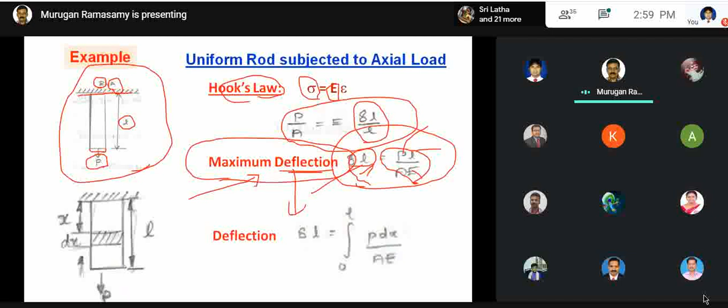If I want to get a mathematical form of this one, that means if I want to evaluate the elongation of this bar at any particular point, if I want to measure the elongation of the bar at a distance x meter from the fixed end, what is the elongation? This equation will give you only maximum elongation. So I want to measure the elongation at any particular point in this. For that I am using the concept of integration. So here we are dividing the total length of the bar into elemental length dx, like that. So this dx is placed at the x meter from the fixed end.

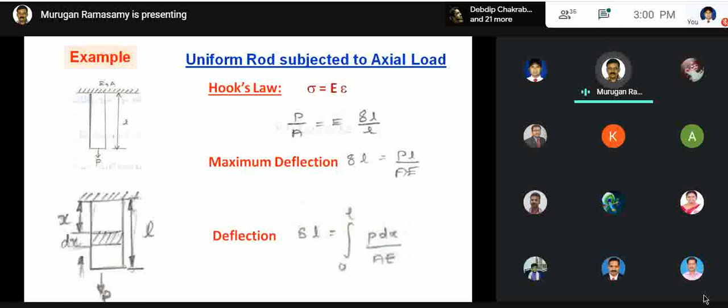So now, without going much into integration, we can directly write this equation for del L. Just compare this and this, that is why I am telling this one. So del L is the deflection. Now if you want to find the maximum deflection using the mathematical form, we are using integration from 0 to L, where lower limit is the fixed end, upper limit is the free end, because x is varying from 0 to L. X equals 0 means here, x equals L means free end.

Now PL by AE, same equation only, we are slightly modifying. Instead of L, we are using dx, that elemental length. So when you do integration of this one, P, A, E are constant, we can take it outside of the integration. Integral dx will give you x. When you substitute the limits for x, you will get L. So finally you will get this equation. So now this is a very simple problem, so we can get the solution easily.

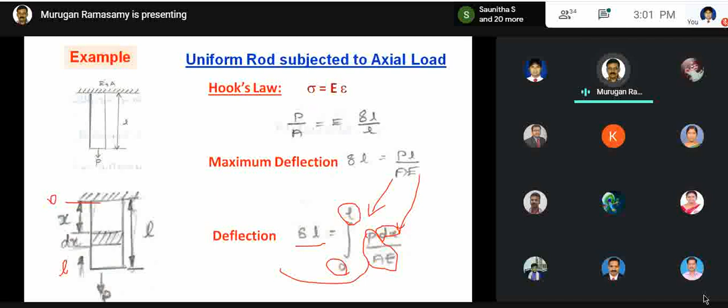Now just I will increase the complexity of this problem. Instead of considering a uniform rod, just let us consider a taper rod.

One minute. Sorry for the disturbance.

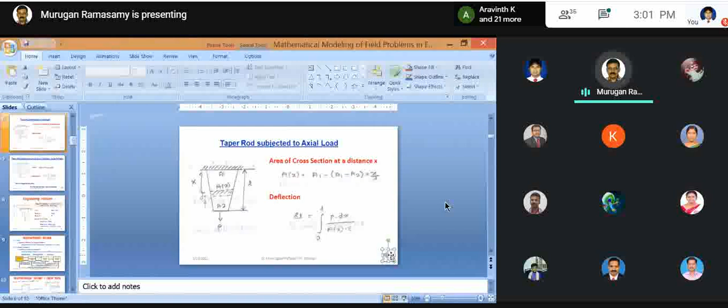Yes, so now I'm just increasing the complexity level of this problem. So am I audible? Yes, sir.

Yes sir, so instead of considering the uniform rod, I am considering a taper rod here. So with taper rod, the area of cross section is variable now. Previously we considered A as constant, but now A is a variable, which is a function of x, depending upon the distance from the fixed end, the area of cross section of this taper rod is going to vary.

So for this equation we can easily derive by using the similar triangle rule. So A of x at any point, the area of cross section will be like that: A1 minus A1 minus A2 into x by L.

Now, if you substitute this variable cross section in the equation we derived earlier, A of x becomes a function, that means a variable of x. So when you do integration, p and e alone are constant now, so we can take p and e outside the integration. What remains is the integral of 1 by Ax dx. We know that 1 by x is nothing but log x, so we get a logarithmic solution.

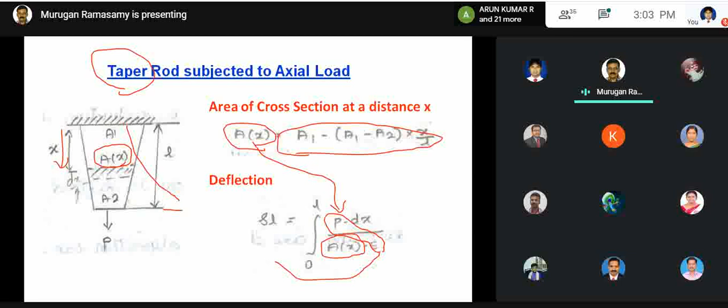Now I'm just increasing the complexity level further. Now consider a taper rod subjected to axial load. The area of cross section is varying and axial load is also acting. In addition to that, we are considering the self weight of the member.

When you consider the self weight, for any engineering problem, the problem will become a non-linear problem instead of linear. So this is the self weight of the member. When you consider it, the self weight will vary from fixed end to free end. At the free end, it will be zero; at the fixed end, it will be the maximum value.

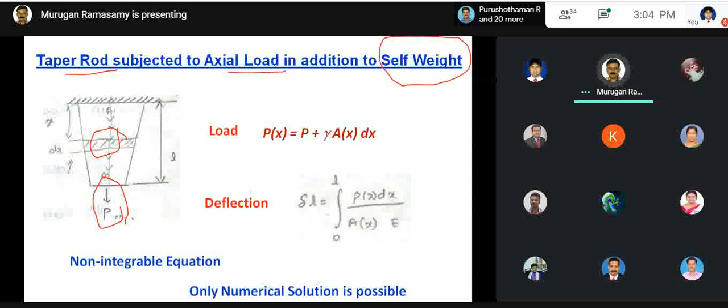How to evaluate this self weight? That is by using density multiplied by the volume. Here I am using the symbol gamma, which is the weight density. There are two types of density: one is weight density, another is mass density. Here I am using weight density, with unit Newton per meter cube.

Now multiply by elemental volume A of x dx, which is a variable. P is constant load, so when you add this, the load becomes a variable now. We have changed the area as a variable, and P of x, the load, is also a variable.

When you come to that integration, P of x as well as A of x, both in the numerator and the denominator, are functions of x. There is no standard formula available in the integration for this. So this kind of problem becomes non-integrable, and we have to depend only on the numerical solution.

So you have to understand, when you take a simple problem like the uniform rod, a standard solution is available. Taper rod with axial load, a standard solution is available. But taper rod with axial load considering self weight ends up with a non-integrable solution, no classical solution available. So we are going to apply a numerical method; FEM is the best way to solve this problem.

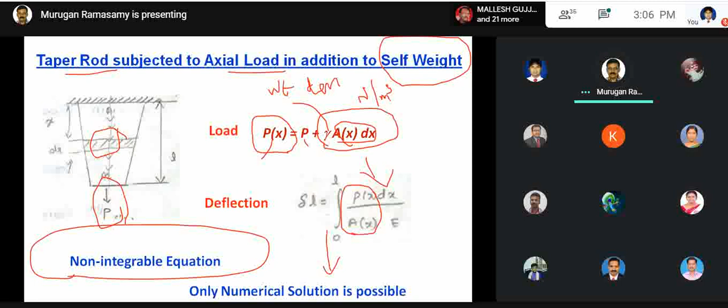Now this is what we discussed for an engineering problem: the complexity may increase in all four parameters. Load may be non-linear, geometry may be non-linear, material behavior may be non-linear, and boundary conditions become more complex. If the complexity level is increased, then we have to depend on the numerical method, that is the finite element method.

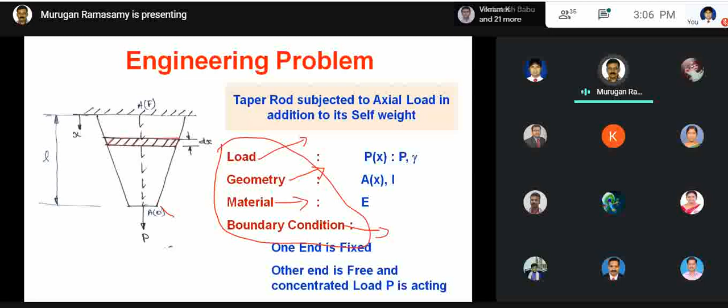Now I will go to what is the mathematical model. We have just finished discussing what is an engineering problem, defined by using 4 parameters. If any complexity is involved in these 4 parameters, we apply the finite element method to solve the problem. To solve a problem using finite element method, first we have to convert the physical problem into a mathematical model.

So what is a mathematical model? It is a set of equations which governs the physical phenomenon. That equation may be either algebraic, differential, integral, or a combination of these. We are trying to define the physical phenomenon in terms of mathematical equations. Once you get that mathematical equation, then only we can do further analysis. That is the important point: as an engineer, we should know how to convert a physical engineering problem into a mathematical model.

So for that, I'll give again one simple example.

Then we will go to the finite element formulation. Before that, remember this point: whenever we convert a physical problem into a mathematical model, we use some assumptions. These assumptions are called idealization. Because of idealization, we are able to model the problem by simplifying it to our knowledge. That means the mathematical model itself contains some error, because of the assumptions. That is called a modeling error.

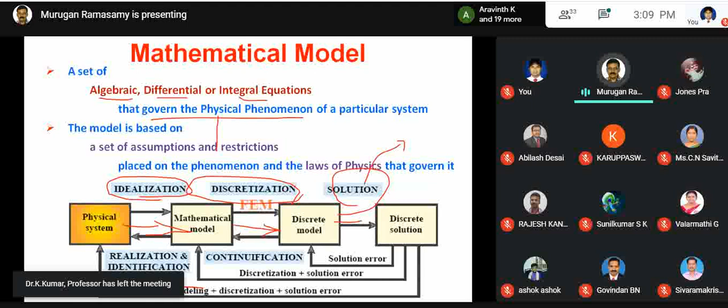This mathematical model is then converted into a finite element model, which is nothing but a discrete model. When you convert the mathematical model to the discrete one, there will be some error called discretization error. When you solve the discrete model using various solvers, we give some compromise to the accuracy of the solution, so we can stop the iteration process. Sometimes we say third or fourth level decimal accuracy is enough.

So like that we can stop the iteration process. That is called rounding off error. We cannot run the program endlessly, so we terminate at a certain level of accuracy. That is called rounding off error. So any numerical method will have all these errors. That is why we say it gives only an approximate solution, but that approximate solution is acceptable.

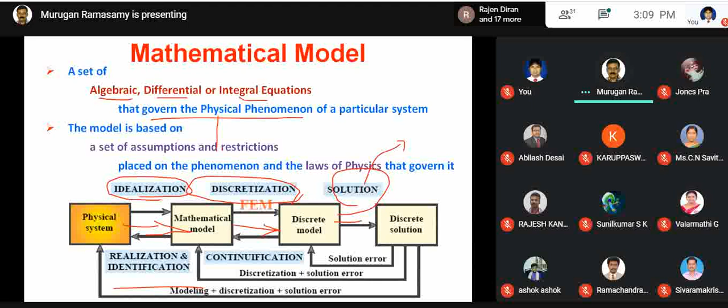Now for a mathematical model, I'll take the taper rod problem, to show how to convert a physical problem into a mathematical model. I consider the same example for continuity. We consider a taper rod subjected to an axial load at the free end, then we include the self weight.

Remember, if you want to convert a structural problem into a mathematical model, we have to do three steps. First, draw a free body diagram. Second, apply equilibrium equations, which mostly will be a force equilibrium equation, or an energy equilibrium equation in case of a thermal problem. We consider an elemental volume, draw the free body diagram, apply the equilibrium equation, then use the constitutive or elasticity equation. Then only we get the governing equation for the particular problem.

I will explain these steps through this simple example. Consider this elemental length dx, which is x meters away from the fixed end. I am showing this dx length as a free body diagram, in the horizontal way.

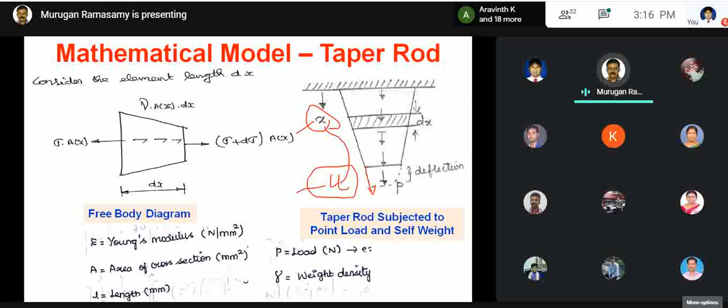So in that case we are trying to define the sigma term in terms of that dependent variable u. Then only you will get the governing equation correctly. So for replacing sigma in terms of the dependent variable, we use the equation called the constitutive equation, or in some textbooks they call it the elasticity equation. We know this is an elasticity equation.

This constitutive equation gives the relation between that parameter sigma and the field variable. So now we can easily replace this. Strain is nothing but du by dx, where du is the change in length and dx is the original length. So by definition we can write du by dx.

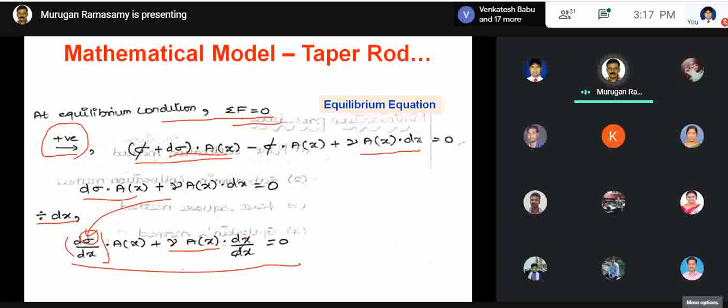So now for sigma we are replacing this term. Sigma multiplied by a will give you the force, right? So e du by dx, and a of x is also there, so we are taking it inside the bracket. So d by dx...

EA du by dx plus gamma a equal to 0. Now, A means A of x, but for understanding purposes I am writing EA.

Now, what is the nature of this equation? It is a second order differential equation with the right hand side equal to 0. That means it is a homogeneous second order differential equation. This equation defines the taper rod problem.

So actually, the original engineering problem is a taper rod subjected to axial load in addition to the self weight. That problem is converted into a governing differential equation. So this thing we have to understand.

So if you want to convert an engineering problem into a mathematical model, it should consist of three things. To convert it into a mathematical model, remember three steps: first, draw a free body diagram considering an elemental volume; then apply the equilibrium equation for that free body diagram; then use the constitutive equation. Depending on the nature of the problem, the equation may differ, so I'll quickly go through different field problems as well.

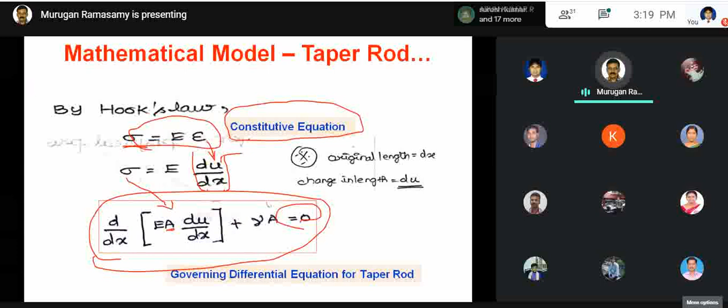Okay, so now for any mathematical model, these 3 things should be defined properly. Then only we can proceed to the further analysis, right?

So mathematical model, just now we derived this one, subjected to axial load and self weight. The governing differential equation will be this one, d by dx, EA du by dx. So it's a second order differential equation. Gamma A, here gamma is weight density, equal to 0.

Then domain, we have to define the domain. What is the limit or bound? So lower limit and the upper limit of this particular variable x, right? That is the domain. And then boundary condition we have to define.

So when you define the boundary condition, either we use the field variable itself or otherwise the derivative of the field variable. Based on that, we have 2 types of boundary conditions. If the boundary of the problem is defined only by using the field variable alone, then it is called the essential boundary condition or primary boundary condition. If you want to define the boundary by using the derivative of the field variable, then it is called the secondary boundary condition or natural boundary condition.

So here I am giving that example also. What is the essential boundary condition? At x equal to 0, what is meant by x equal to 0? Fixed end, right? X equal to 0 means fixed end. U of x equal to 0, that is displacement or deflection, is 0. Fixed end, no deflection, so 0. So this is one boundary condition. So most of the structural problems will have this boundary condition. So for solving the problem, this essential boundary condition is important. The problem may not have a natural boundary condition, but without essential boundary condition, we cannot solve the problem. That is why it is called essential boundary condition.

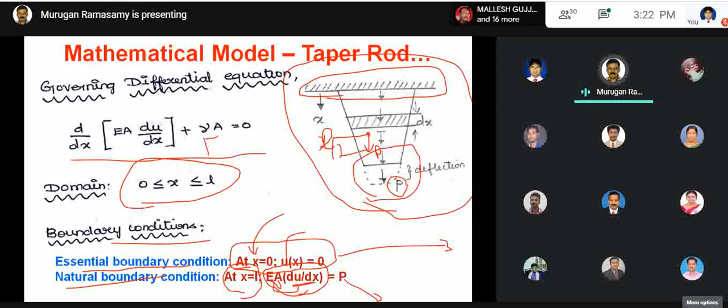Not only the free end, at any point inside or along this length, the boundary condition will be like that. It may be at x equal to L by 2 or x equal to L by 3. If the P is acting somewhere here, let us say the load is acting here, and at this particular point, let us say it is L by 2. So what will be the boundary condition? At x equal to L by 2, the load is acting, right? EA du by dx equal to P, like that they will define, instead of free end. So this is an example of the natural boundary condition you have to understand.

So here the field variable itself is used for defining the boundary. That is why it is called essential. Here derivative of the field variable is used. That is why it is called a natural boundary condition or secondary boundary condition. That difference you should know.

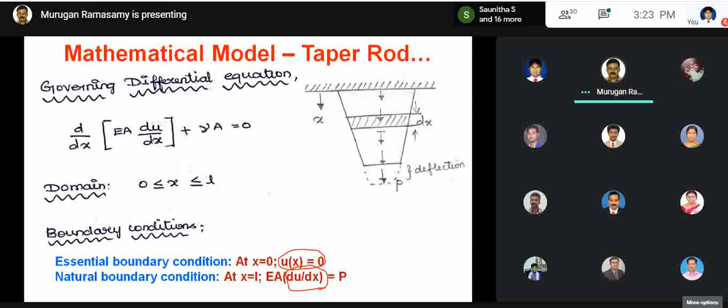Now similarly I have taken many examples for structural problems and thermal problems. I quickly go through this. I will send this PPT also, no problem, because I have to give finite element formulation also. So now remember, if you want to convert a physical problem into a mathematical model, the 3 steps you have to remember. First you have to consider an elemental volume, then apply equilibrium equation, then use constitutive equation, then you will get the governing differential equation.

So for simply supported beam, right? Earlier we considered a bar. Now if you take the beam, the equation is slightly different. So here I am taking a simply supported beam. One end is supported by hinge support, another end is roller support.

When we consider the self weight of the beam as small w, weight intensity, the beam will tend to deflect in this way. So when you define the length, along the x direction, this is the x direction, but deflection is happening in the other way. That is why it is called the transverse deflection or lateral deflection. So if you want to define or measure this deflection, here I am using y as the variable. So y is the lateral deflection or transverse deflection. What is the independent variable? X, right? So now you have to understand clearly this problem.

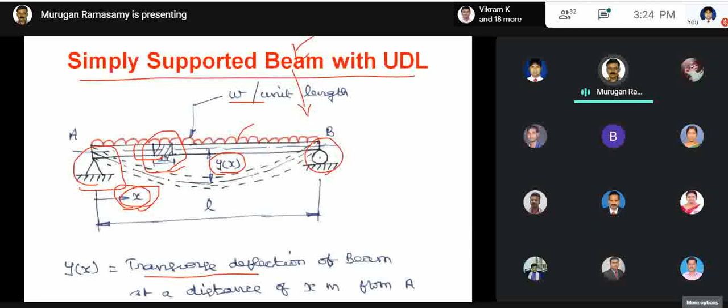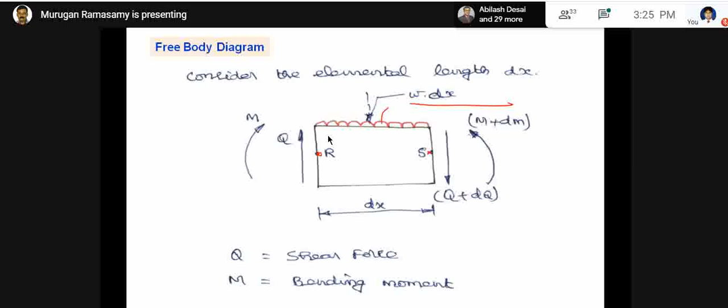So for this we are taking an elemental length dx. For this elemental length, we are considering the free body diagram. For this element length, this is the load intensity, and on either side we are taking the shear force and the bending moment, which you have already studied in strength of materials. So we have to take the positive shear force and the bending moment, and now since we have both the force and the moment, we are going to use the force equilibrium equation as well as the moment equilibrium equation. So that means we will get 2 equations, right? Those 2 equations are used for defining the governing differential equation.

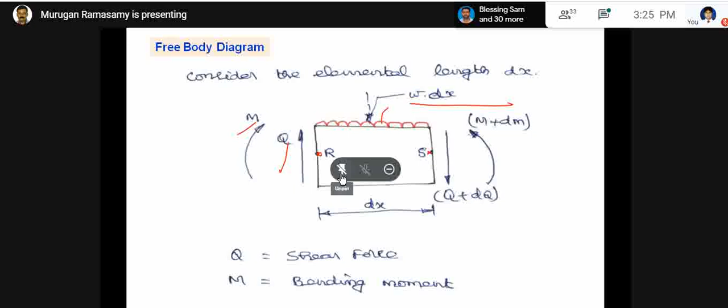Now first we are applying the equilibrium equation for force. Here shear force and the weight densities are involved. By using this we are getting one important relationship: rate of change of shear force is equal to load intensity.

Then by using the second equilibrium equation, the moment equilibrium equation, we use the moment m, moment due to shear force, and moment due to load intensity, everything is considered. Now the important relationship we are getting: rate of change of bending moment is equal to shear force.

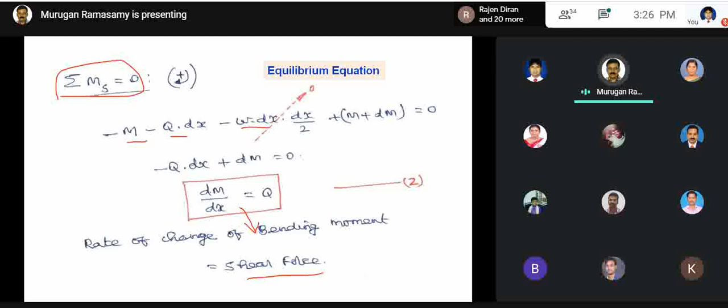So these two relationships are going to be used for the constitutive equation. What is the constitutive equation for the beam problem? The bending equation, the famous bending equation, m by I equal to sigma by y equal to E by R. This is the constitutive equation, where m is the bending moment, I is the area moment of inertia, E is Young's modulus, and 1 by R is the radius of curvature.

So from this equation we can write bending moment is equal to EI by R, where this bending moment m, and 1 by R is equal to d square y by dx square, the radius of curvature, defined by geometry as in the textbook.

So we are defining the bending moment in terms of the field variable, but it is a second order derivative of the field variable. EI d square y by dx square is the bending moment.

Now using that relationship, rate of change of bending moment is shear force. So dm by dx is nothing but EI d cube y by dx cube. This is nothing but shear force, defined by y, but it is a third order derivative of the field variable.

Next we use that first relationship, that rate of change of shear force is equal to load intensity. So when you use this one, load intensity is equal to dq by dx. Again differentiating, EI d power 4 y by dx power 4. So the load intensity is also defined in terms of y here.

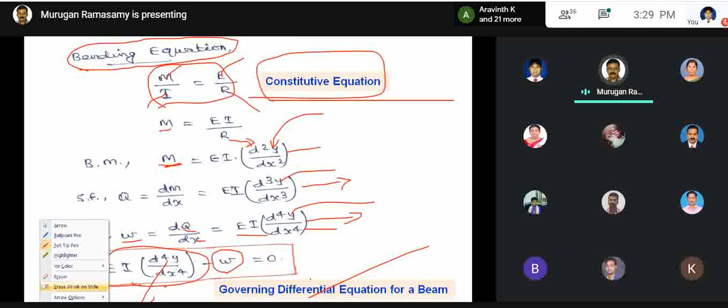So there are different types of beam: cantilever beam, simply supported beam, fixed beam, overhanging beam, propped cantilever. There are different types of beam. For all types of beam, the governing differential equation is the same.

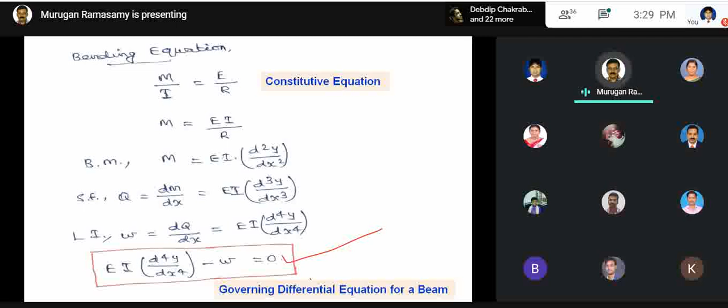Then how to differentiate the various types of beam? Only by using the boundary condition. Only by using the boundary condition can we differentiate the types of beam.

So for a simply supported beam, at x equal to 0, because of the support, y is 0. At x equal to L, because of the support, y is 0. And since it is simply supported, the end rotation is permitted, so bending moment will be 0. That is why EI d square y by dx square at x equal to 0 equals 0. That means, as we already know, the second order derivative is the bending moment. Similarly, at x equal to L, bending moment is 0.

So in case of a cantilever beam, the boundary condition will be slightly different. So that thing we have to understand.

Similarly, we can consider a heat transfer problem. So how do we convert a mathematical model of this heat transfer problem? For that, I am taking a cooling fin example. Here also we are using that elemental volume, and we apply the equilibrium equation.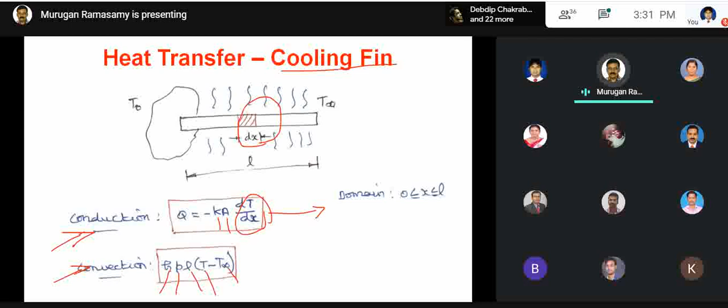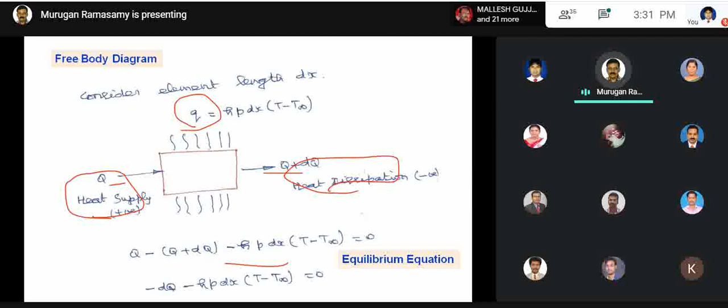So by using this, we can easily get this one. This is the free body diagram, heat supply and heat output. This is taken as negative, and on the other side we take the amount of heat through convection mode. This is conduction mode, this is convection mode. Then we form the equilibrium equation and apply the constitutive equation. What is the constitutive equation? This one, Fourier's law. Fourier's law is the constitutive equation. By that we get the governing differential equation.

What is the field variable here? The temperature. So second order derivative: Ka d square t by dx square minus hp times t minus t infinity. This is also a second order differential equation, which defines the heat transfer through a cooling fin.

So like that, for a mathematical model you have to define the domain and the boundary conditions. At x equal to 0, t equal to t naught, that is the source end. Free end at x equal to l.

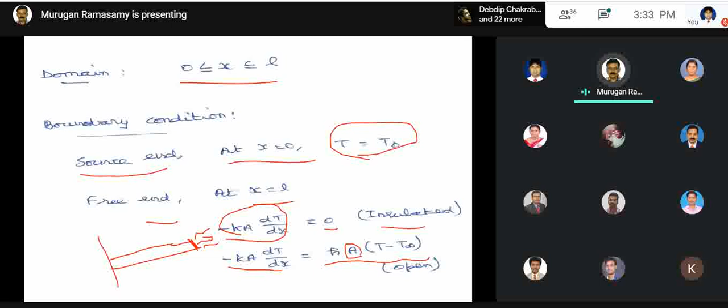So like that, longitudinal vibration. I will quickly skip this one because it is similar to the first one, the taper rod problem. The only thing is, in the free body diagram, in addition to this, we consider the inertia force because of the dynamic problem. By using D'Alembert's principle, we add the inertia force to the free body diagram, so the dynamic problem becomes a static engineering problem and we can easily apply the equilibrium equation. This inertia force acts opposite to the line of motion, you have to know that. Then apply the force equilibrium equation.

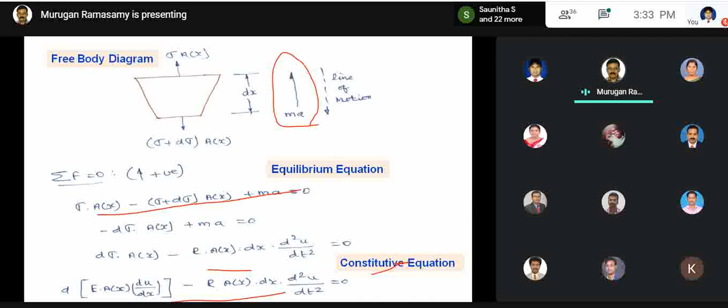Finally, we end up with the equation, after applying the constitutive equation - here the constitutive equation is the same, Hooke's law only. Then you get the governing differential equation in this way. This is also a second order differential equation, but this is for the inertia force term. Here rho is mass density, area of cross section, u is displacement. Here t is the time and x is the displacement coordinate. There are two different independent variables, right? So we have displacement as well as time.

So for solving this type of problem, normally we use simple harmonic motion. We define u as capital U sin omega t. So the motion follows simple harmonic motion like that, and by that way this time domain problem is converted into a frequency domain problem, which we can easily solve. Most vibration problems are solved by assuming the system follows simple harmonic motion like that.

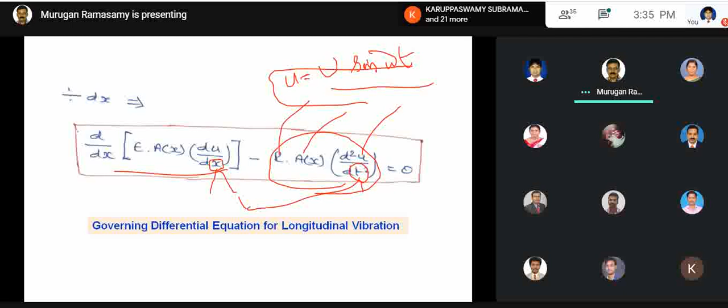So I have shown some examples here for the dynamic problem. In the boundary conditions, in addition to the boundary condition, we have to add an initial condition also because time is involved. At t equal to 0, what is the displacement? At x equal to 0, what is the displacement? Like that, they show the boundary condition and the initial condition. So to solve the problem, we assume u as a function of x and t, two independent variables, and we convert into only omega t, converting into the frequency domain.

So till now what we discussed is how to convert. I'll take another 20 minutes to understand how to convert a mathematical model into a finite element model.

Till now we discussed what is an engineering problem and how to convert an engineering problem into a mathematical model. A mathematical model is nothing but a set of equations. Most physical phenomena will be defined by a differential equation only.

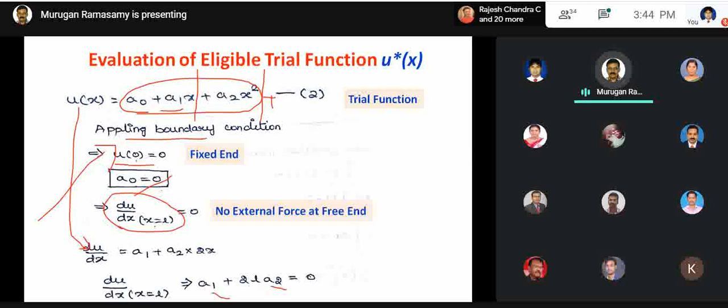Now let me summarize. We have a mathematical model, a physical problem converted into a mathematical model. Now we are trying to solve the mathematical model by assuming a trial function. The trial function is converted into an eligible trial function. So now if I use this u star of x in the governing differential equation...

What is the governing differential equation? This one: ae d square u by dx square plus q naught. So if I use u star of x at this particular place in the governing differential equation, this equation will not become equal to 0. Why? Because u star of x is still only a trial function, so any trial function will not satisfy this equation.

When the right hand side becomes 0, if I get the exact solution for u, that u alone satisfies this equation. All other trial functions will not satisfy this equation. So when the trial function is substituted into this governing differential equation, it will not give 0 — there will be some error, or residue. That is why this equation is called the residual equation.

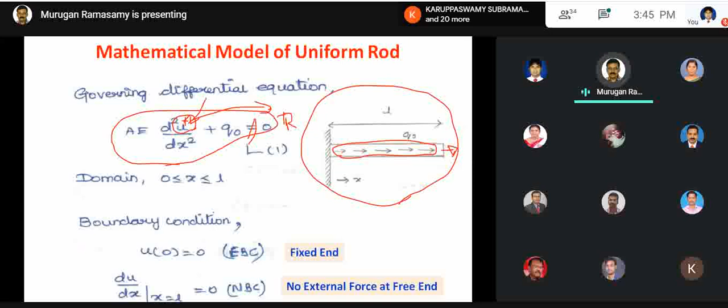So when I substitute the trial function in this governing differential equation, that equation becomes the residual function. This point you have to clearly understand, because we have to know what residual function is, then only you will understand the further methods.

So now, how do we get this r of x? Our trial function, this u star of x, is substituted in the equation: ae d square u by dx square plus q naught — that is our governing differential equation. So d square u by dx square is recalculated based on the eligible trial function, and it equals 2a2. The q naught is taken the same way. This is going to be considered as the residual equation, or residual function.

So what is a residual function? When the trial function is substituted in a governing differential equation, the governing differential equation becomes the residual function. You have to understand the physical meaning — for solving an engineering problem, the mathematical model is very important. Now you will understand and appreciate the importance of the mathematical model, the governing differential equation, based on which we are deriving this residual function.

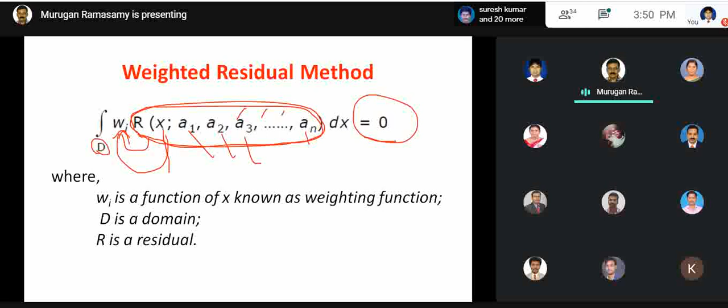This is the concept of weighted residual method. So now how to choose this weighting function or weight function? Different methods suggest different procedures, but the Galerkin method is one of the best methods. Based on this Galerkin method only, we are going to develop the finite element equation. So what is the advantage of the Galerkin method?

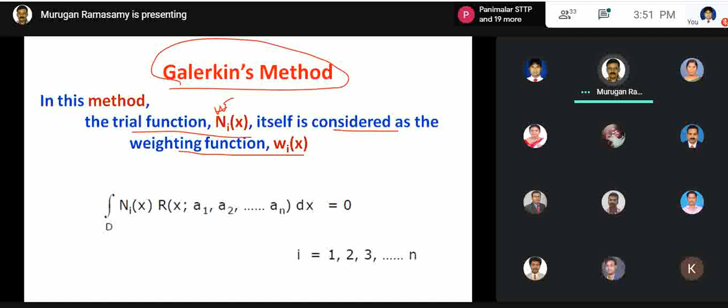This method's trial function, w of x, the trial function Ni of x itself is considered as the weight function w of x. So what is the trial function? Whatever that trial function may be is used here, then integrate over the domain, then we can equate to 0. So in that way we can simplify our problem.

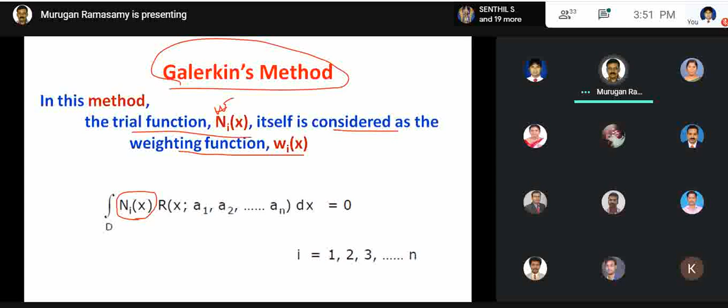So now coming to that previous example, what we considered here, a uniform rod subjected to axial load in addition to self weight. This is the governing differential equation. When you substitute u into u star, this will become the residual function.

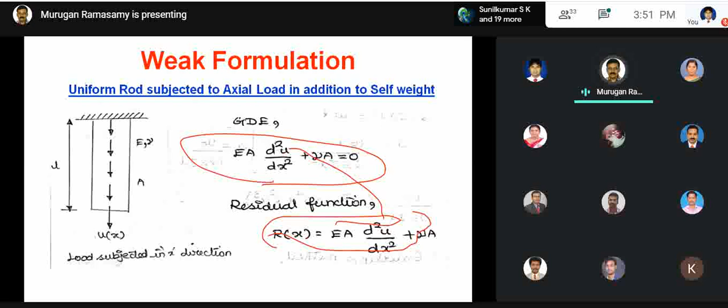Now what is the Galerkin method? We have to multiply the residual function with the weight function and integrate over the domain. This is the symbol omega, another symbol used for defining domain, and equal to 0. So here what is the r of x? EA d square u by dx square plus gamma a, which is the uniform rod problem, multiplied by the weight function w of x, dx, equal to 0.

So as per the Galerkin approach, this weight function may be, in the previous example, just to explain the residual function, I took this example. So here, in this case, all are constants: 2aE, a2, q0, all are constants, no trial function, that is no x term is involved here.

But in this case, this one can be considered as a weight function, x square minus 2Lx. So this one we can multiply with the r of x. R of x is this one, and integrate over the domain 0 to L, and equate to 0. This is the Galerkin method actually.

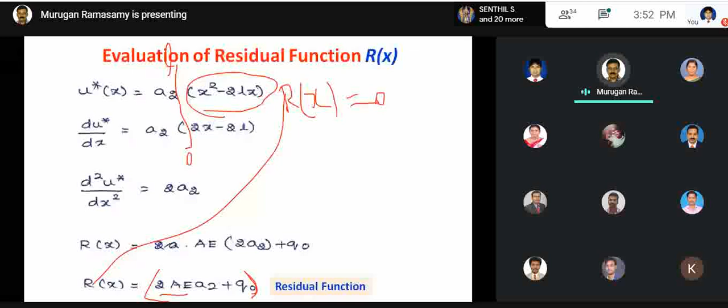So the governing differential equation is converted into a residual function, and that residual function is multiplied with the weight function. That product of residual and weight function is integrated over the domain and equated to 0. So this is the basic idea of the Galerkin method.

Now, what is the advantage of the Galerkin method? When you multiply this w of x inside this bracket, we'll get EA d square u dx square multiplied by w of x, the weight function, and gamma a again multiplied by w of x, the weight function, equal to 0. We are getting two different terms.

Now the first term, in the first term we have integration as well as differentiation. So this type of equation is called an integro-differential equation. For that we have a standard formula called integral u dv is equal to uv minus integral v du. Why is this formula applied here? For reducing the order of differentiation.

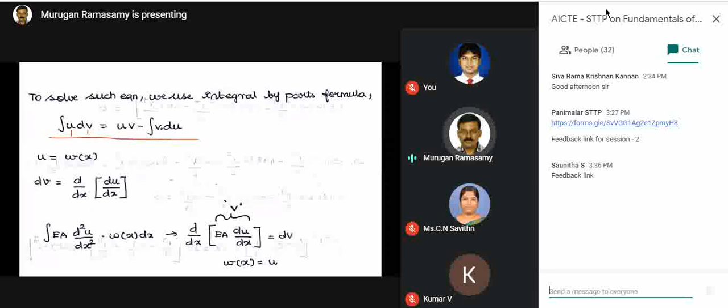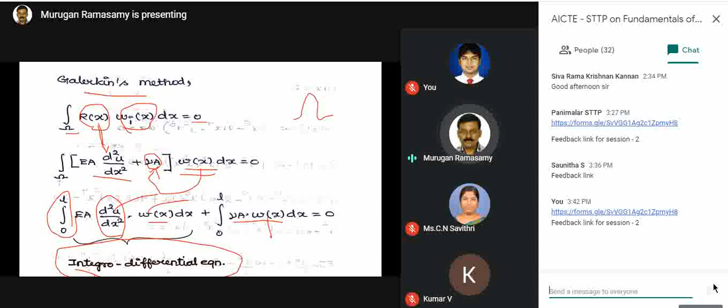So in integral u dv, there are two functions. You see, u is the function of x, w is also a function of x. Here u is in the second order derivative, w has no derivative involved. So now we are trying to change this. U as well as v are both functions of x. It can be written like this: product of uv minus integral v du.

So this is called the integral by parts formula. By this way, our u is w of x, the weight function. dv is d square u by dx square, written as d by dx of du by dx. So what is v here? V is du by dx.

So when you write integral EA d square u by dx square w of x dx, it is equal to, first we write the uv term. What is u? W of x multiplied by du by dx. Integral v du, what is v? V is du by dx. Like that we will get the uv term and the integral v du term.

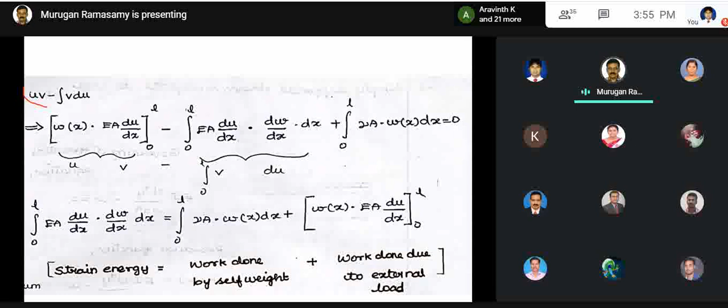Then in addition to that, the second term, integral gamma A w of x dx equal to 0. So this is the integral by parts formula. We are getting this term.

So for each term there is a physical meaning, that is what I want to explain here. So I am writing this term first, integral 0 to L. We are taking this to the other side of the equation, so EA du by dx dw by dx into dx is equal to gamma A w of x dx plus this term, EA du by dx.

So this is nothing but similar to the physical phenomenon called strain energy. This is like work done, also work done due to self-weight. We know that work done is nothing but force multiplied by distance. So that is the physical meaning of this term.

This is the final equation. On the left hand side, the second order derivative d square u by dx square is reduced to a first order derivative. That is why it is called a weak form of this governing differential equation of the uniform rod.

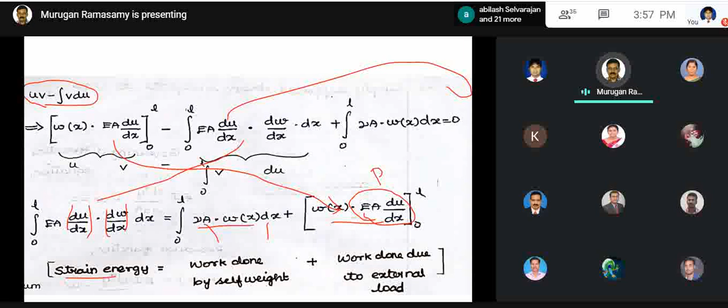So here self weight gamma A w of x, and here p of x. Why is it p of x? EA du by dx is nothing but p, we already know. So p of x multiplied by w of x is shown here.

So this is going to denote the boundary, that is the natural boundary condition, denoted here. In this way, if this term is not there, then we still have the equation only with the self weight. If the additional load is acting, then only will we have this boundary term.

So now this is the weak form of the governing differential equation of the uniform cross-section rod. Again, first the engineering problem is converted into a mathematical model. That mathematical model is converted into a residual equation, which has a second order derivative. That residual equation is converted into weak form by applying the Galerkin method.

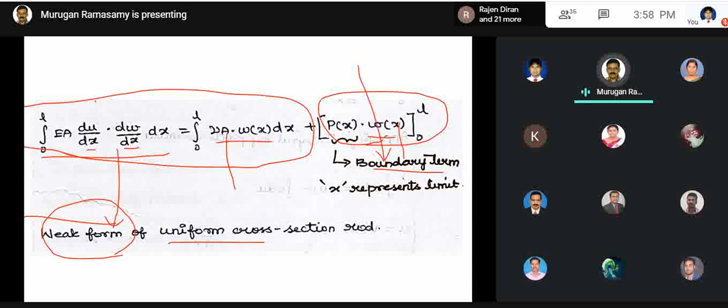Now to this Galerkin method only, we are going to apply the finite element concept. So...

Now I'll take a few more minutes to complete these important fundamentals. So now in the finite element method, actually there are different types of elements used for solving different types of problems. The main classification of the element is based on the dimension involved, so one dimension element, two dimension element, three dimension element, like that.

So here for this uniform rod problem, the displacement is only along the x direction. So we can use the one dimensional element, which is called the line element. For that line element, for any finite element, we have to define certain things. For this line element, there are two end nodes, 1 and 2, and L is the length of the element.

At each node we are defining a field variable, u1, u2, or ui, uj. So if node 1, it will be u1, and this will be u2. That is the nodal parameter or nodal displacement, we call it. So inside this element, which is the element length, what is the u value, what is the u2 value within the element? That is defined using this polynomial.

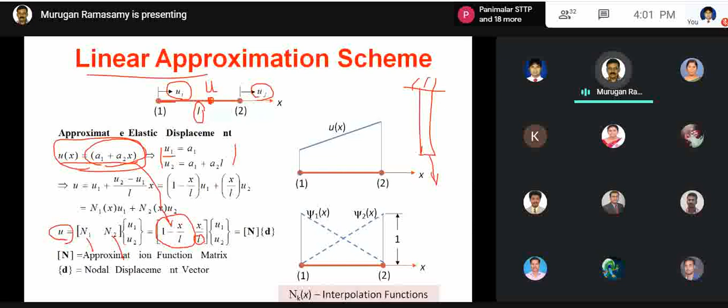Where x is the distance measured from node 1, l is the elemental length, that you have to know. Now in finite element method, if you use this line element, we have to know the characteristics.

The shape is line. In case of 2D, it may be a triangle or rectangle like that. Number of nodes used is 2 nodes, only primary nodes. The nodes which are at the end of the element are called primary nodes. If you introduce any node inside the element, that is called a secondary node or higher node.

Next is number of degrees of freedom at each node. Here at each node we are defining only 1 degree of freedom, u1 and u2 like that. So number of degrees of freedom is 1 actually. Total degree of freedom is 2: number of nodes into degree of freedom at each node.

Number of shape functions is 2. This is 1, so number of shape functions is 2. Total number of shape functions is 2. So these are called the element characteristics. Once you know these element characteristics, we can easily formulate the finite element equation.

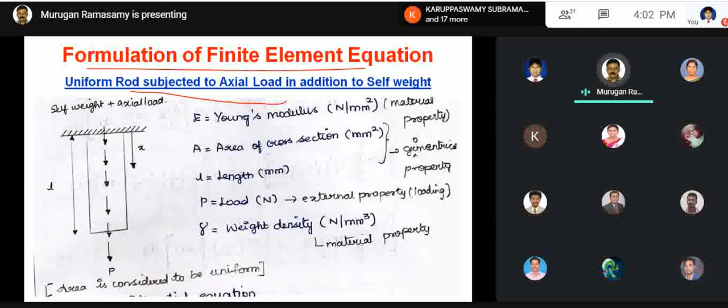The finite element equation can be formulated only after getting the weak form of the particular problem. So what is the problem we are considering? A uniform rod subjected to axial load in addition to the self weight. For this one, we have the governing differential equation, domain, boundary condition, and the weak form. Up to this we have derived, right?

Now, in terms of u, we are going to apply that function by finite element analysis. U of x is nothing but n1 u1 plus n2 u2, where n1 and n2 are called interpolation functions or shape functions. u1, u2 are called nodal parameters, that is nodal displacement values. So n1 is nothing but 1 minus x by l, n2 is nothing but x by l.

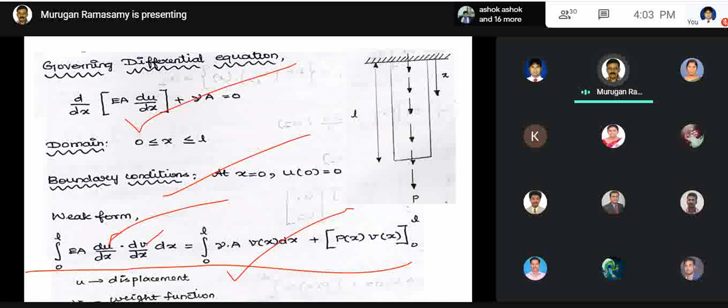So now when you apply u of x is equal to this one in the weak form, we are going to apply u is equal to n1 u1 plus n2 u2. V is going to be n1 or n2, right? So here u of x is assumed n1 u1 plus n2 u2, and v of x is assumed n1.

So in that case, we will get one equation. When you assume u of x equal to n1 u1 plus n2 u2 and v of x equal to n2, you will get the second equation. So the two equations will form the element characteristic equation. Now we are solving this equation, participants.

So when you substitute dn1 by dx - what is n1? n1 is 1 minus x by l. When you find dn1 by dx, it is minus 1 by l. n2 is x by l, so it is 1 by l. So when you substitute dn1 by dx, dn1 by dx, and dn2 by dx everything into this equation, the equation will be simplified.

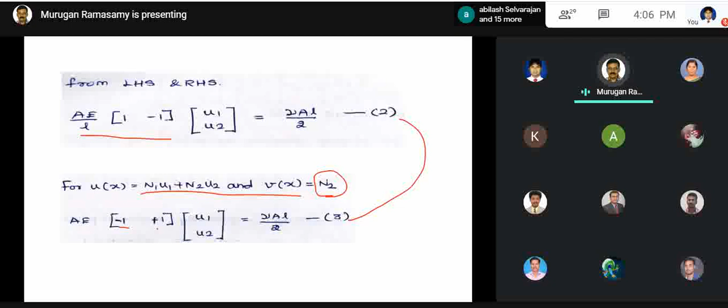So one equation will be AE, 1 minus 1, u1 u2, gamma AL by 2. Similarly, when you use V of x equal to n2, we will get a similar equation. Here, what is the difference? Instead of 1 minus 1, we will get minus 1 and plus 1.

So on combining these two equations, you will get the element characteristic equation for the bar problem. That is AE by L, 1 minus 1 minus 1 1, u1 u2, gamma AL by 2, 1 1, P of 0 and P of L. What is P of 0? External load or point load at x equal to 0. Point load at x equal to L. So this is the general format of the finite element equation.

So this is going to be called the stiffness matrix. This is the displacement vector. This is the load vector. These are the boundary terms. So K multiplied by U is equal to F. This is the finite element equation.

So for any problem, we can define this finite element equation. It may be a structural problem, a thermal problem, a fluid problem, or an electrical problem. The procedure is the same.

Once again, I'll summarize. First, for any engineering problem, we have to convert it into a mathematical model by using the equilibrium equation. Once the mathematical model is arrived at, it is converted into a residual function by applying the Galerkin method, right? So after applying the Galerkin method, it will become the weak form.

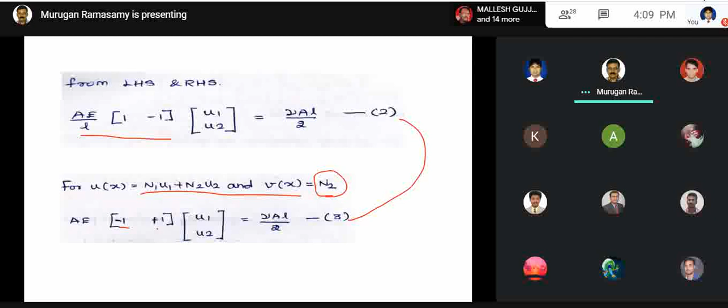So within this stipulated time, I will try to cover how the finite element formulation is done.

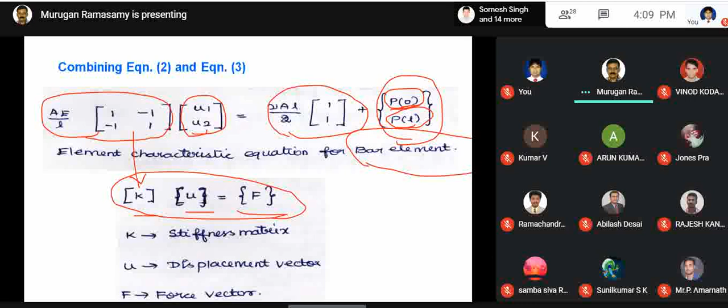Sir? Yes, sir. Sir, Arun sir, we are at the beginning stage in the FEM subject. Will you provide notes at the basics level so we can improve ourselves, sir? Yes, definitely, sir. We will try to give some PDF format, some e-books, and also this type of notes, at the end of the program. We know your email ID, we will send it there. Thank you, sir. Welcome.

And the important thing is understanding the engineering problem, and you should know some basic mathematical knowledge, how to convert the engineering problem using the available equilibrium equation. So once you have the mathematical model, everything is mathematics, simply mathematics. Finite element method is purely mathematics only.